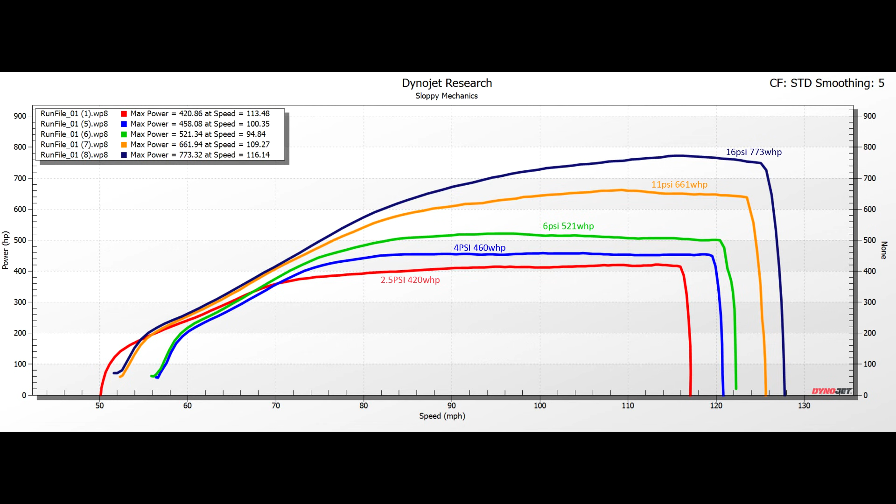We're going to go over my buddy Doug Kistler's Nova, and this is one of those guys, you know, one of your friends, maybe it's possibly you, you know who you are, that has trouble with literally everything. You have the worst luck ever. We call it Doug luck. That's how bad Doug's situation is, and it has been up and down many times throughout the year or two,

Anyway, he did drag week last year, and he actually made it through the whole week and had a decent average. Doug had a built engine, and it gave him trouble with spinning bearings and some other stuff, and I was like, dude, you don't have to listen to me, but take everything out, put in a garbage SBE, start over. So he did that, and he put a different turbo on. He had a 7875 before, a funky wastegate situation, a lot of things.

So he and his friends redid the hot side, and they hung a VS Racing billet 8088 with twin 44mm gates, and he went from a 3-port to a 4-port. A lot of things all at once. Fixed everything up. Doug has had a 4303 fuel pump and SEP 1500s, the old school Deka, for years now, at least since 18 or 19. He's got a Terminator X. It's a stock bottom end 6-liter right now with a Jegs Stage 2 turbo cam and the Jegs XHD converter.

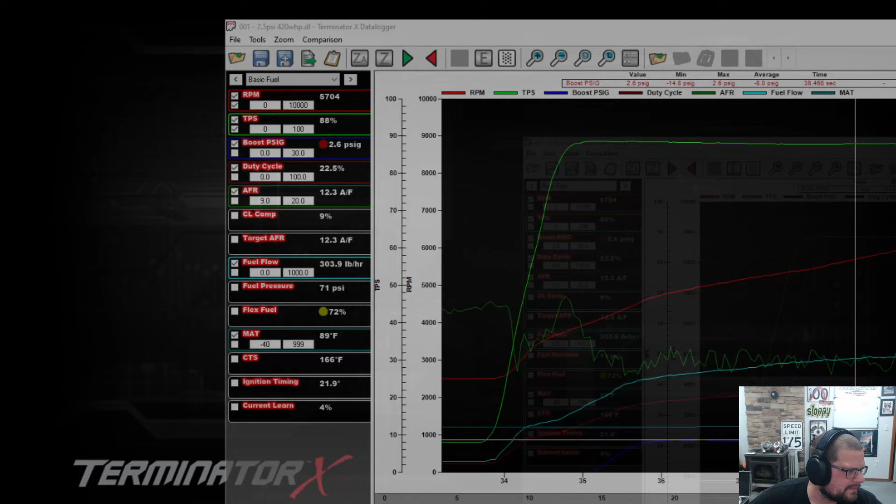So, anyway, we make a test hit here. Roll into it. Everything's good. And it makes 420 horsepower at 2.5 pounds of boost. So I'm bringing up the log for you guys real quick here. No shortage of drama here. So those are same boost. Alright, I got it. Look at this. Twin 44mm VS gates. Look how flat that boost line is. 2.5 pounds. Made 420 rear wheel. Now this is pump ethanol.

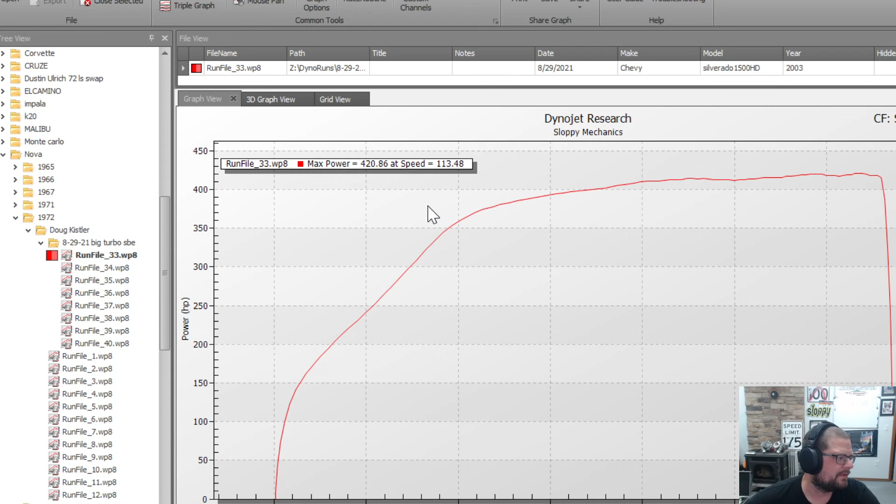And for Doug, with the Doug luck thing going on, I had put in an almost pump gas safe spark table. And also I made the air fuel targets pretty much pump gas safe also, even though he's running E85, because of the whole drag week Doug luck. I hope you understand. I know most of you understand this. So very safe. So that was only 2.5 pounds and 22 degrees, which is nearly nothing. And it made 420 rear wheel, unlocked, TH400, Jegs XHD.

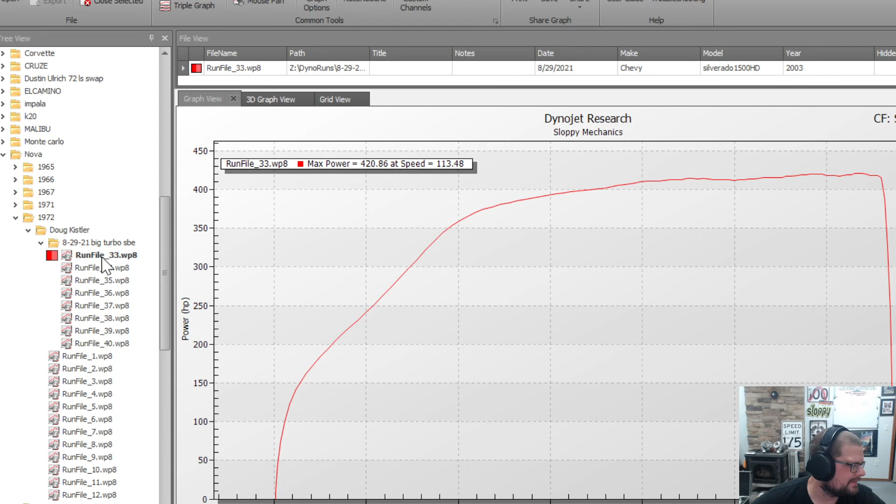So then we messed around with the boost controller a little bit. So this goes to run number 4, which I believe shows some increase. 3.8 pounds. So run number 4 has a 35% duty cycle, 4 psi. So it came up a tiny bit. And what you got was, see, these are a funny number. I have to fix these. 1, 2, 3, 4. 418. Pardon me, gentlemen. Okay, so it made 460, which is what this matches. So a tiny bit more boost picked up a good amount of power.

So this is when we got the wiring sorted, and also this is only a 2.5 pound spring, and it has a 4-port boost controller. So it takes a little bit till you get to some sort of working range, and that was 35% duty. And then, well, let's dig it up, right? So then we go to 6 pounds, V2, 6 psi, V2. So let's show you here. Very level, the twin gates, always astounding with the level. So 5.8 pounds made 521 rear wheel.

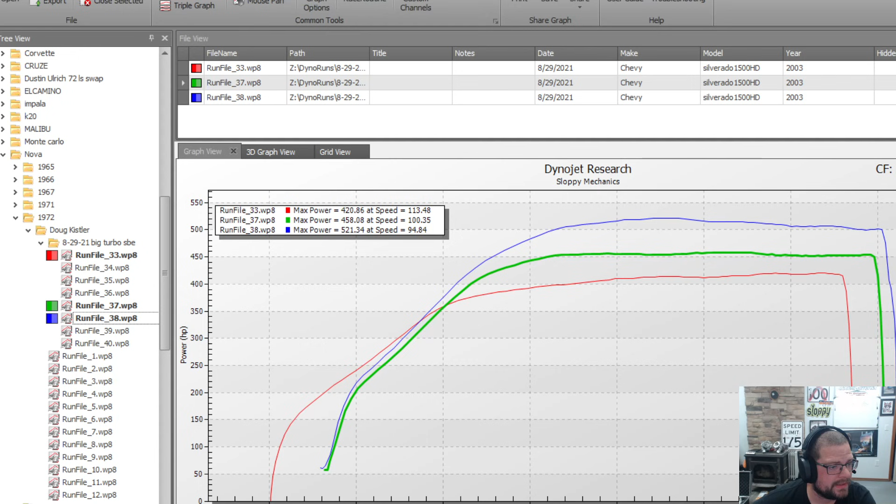That's this one. So this is only 6 pounds. Coming up really nice. Imagine that. So there we go, moving right along. The next we hit was 11 pounds.

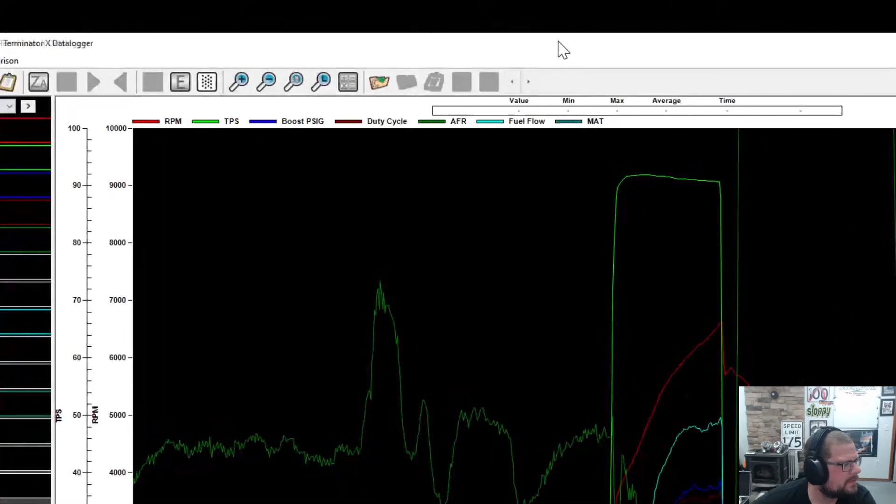So come on over here, give this a quick highlight. So 11.3 pounds made 661. We're gonna look at this quick. Yep, 11 pounds. Man, it really came up. 6 to 11 pounds here. Look at that delta. Woo!

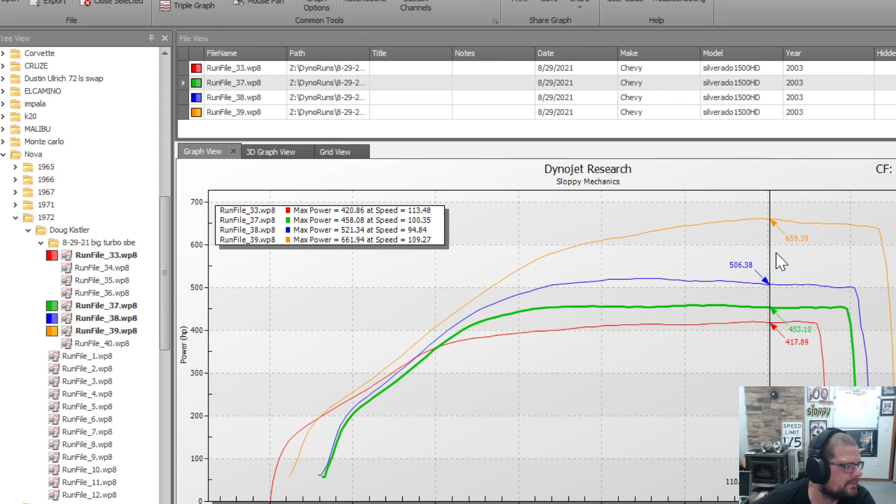Like 160 rear wheel on the climb. Even more there. So yeah, that was a very nice increase. I was throwing some duty cycle at it just to try to get there. And then now I should say that Doug's goal was 700 wheel, because this is a marketplace engine with 160-some thousand, which I said is mint, and he was so surprised it fired the first time.

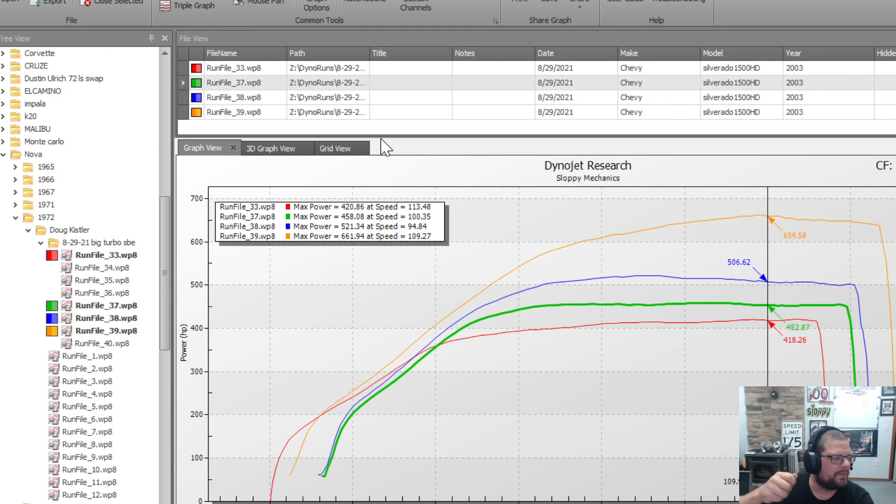It hasn't smoked a day, and you can see when I lift at the top of the gear, it doesn't even puff. So he was nervous, and he's like, you know, I only need about 700 wheel to foot brake 10.0s, which he runs a 10.0 class. And then I installed one of my dial-a-boost things so he can run with the dial, and if it's too fast or too slow, he can just dial it up and down.

So then on the next hit, we just went right for it, and I threw a little bit more boost at it. And let's go ahead. This is the log for the last one. Here. And now, I wasn't running much of a load on the dyno either. I should have loaded it more, to be honest. So boost came up to about 17 pounds.

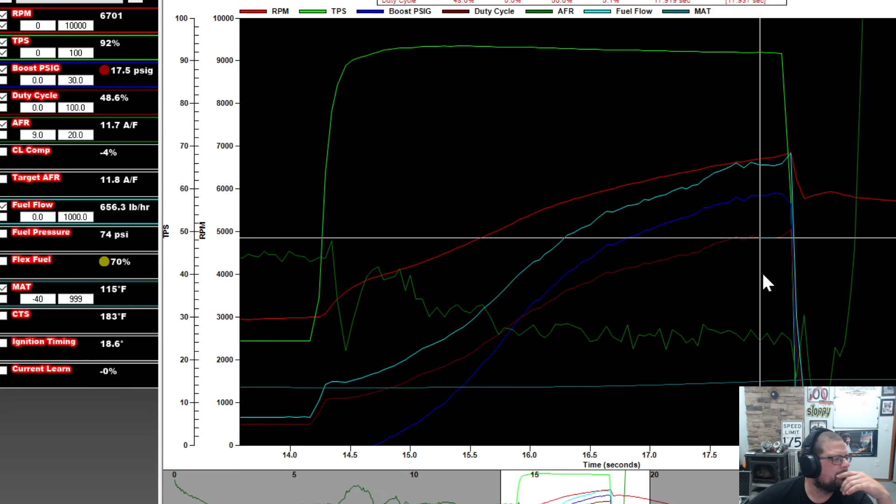It's only using, see, this 11.8 air fuel is very safe on ethanol. I could push that probably into a mid-12 and gain horsepower for sure. And 17 pounds and 18 degrees is a little bit light also for a combination like this. But all of that is intentional, because it still made almost 800 to the tire through an automatic conservatively, and only half of the injector on a Snake Eater 1500 with 70% ethanol. So that's another thing to note.

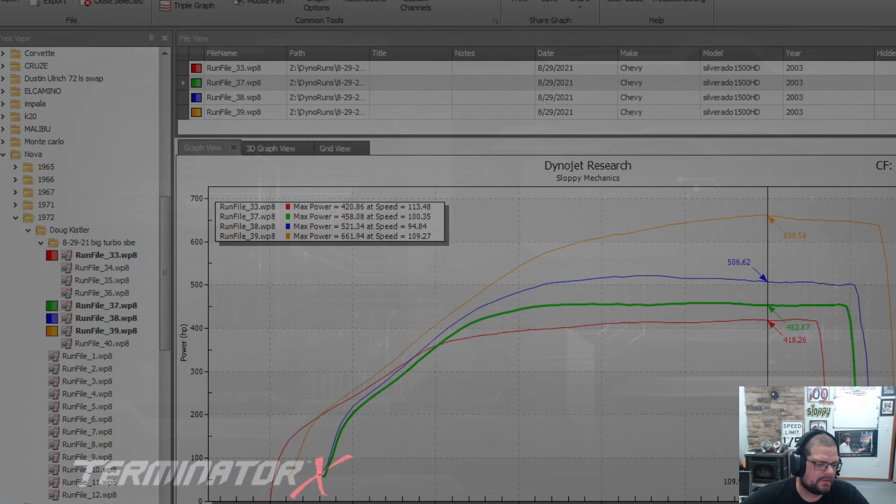And then that was this guy right here. Man, it just eclipses like crazy, right? This is 6, 11, and 17. It's just coming up like crazy, and in my opinion, it's under-timed. So that's all he needs to run what he needs to. So that's it. And then Doug has also said he would love to finish drag week and some passes at the end of the year, and then crank this thing for all it's worth on the dyno and track. So that's what we're going to do, obviously, when the time comes and if it survives.

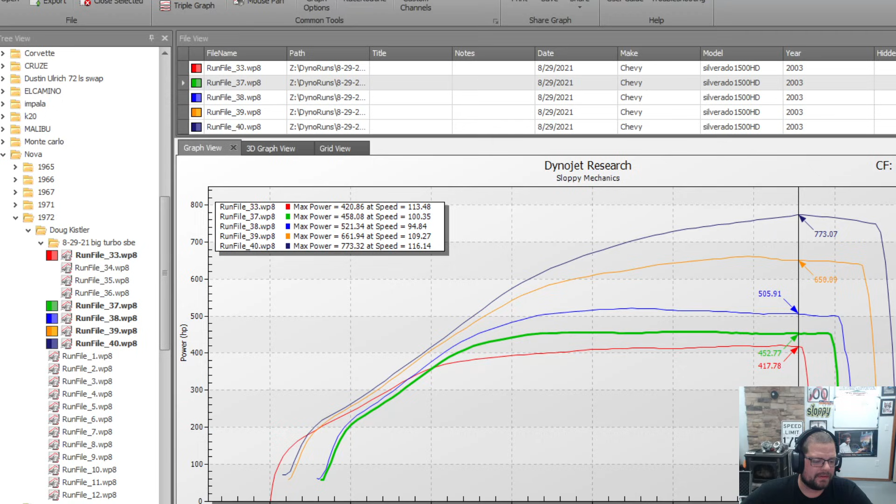But I hope you guys all enjoyed. We have a drag event coming up very shortly, so we needed to hash this out. I put in a safe ignition table and quickly did a fuel setup, and alarmingly, ridiculously, take a look at my closed loop fuel trims, negative 3%. It's extremely close. So we didn't make a lot of hits here.

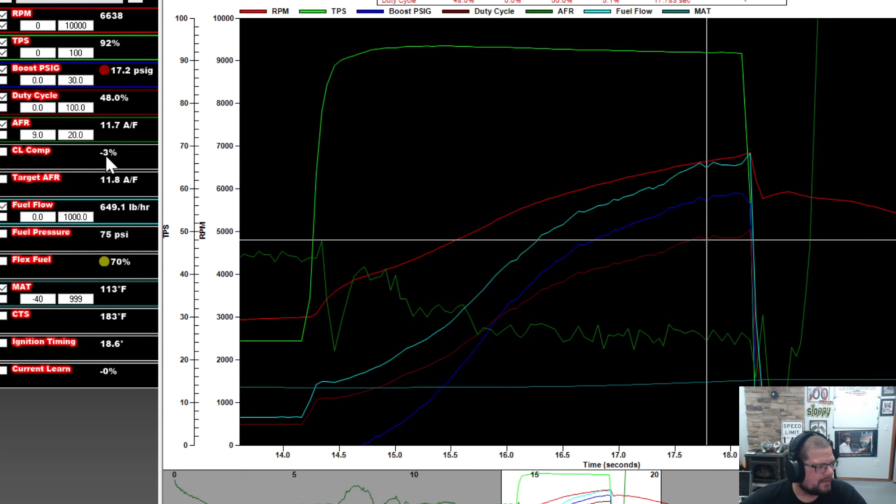It was conservative, and we're letting it go, and we're going to make passes at the track to see how this works out. So we did not do a ton of hits. We did not adjust timing much. It put down very solid numbers for what I had into it. So we're going to go with that, and it's going to get a fresh plug at the track, blah, blah, blah. But on a conservative table I threw at it, it made outstanding power, so we weren't going to smash it that much.

Again, because of Doug's luck, and the power figures were phenomenal for what was in it. I think I said that like 10 times, but I hope you guys understand. This isn't a showcase for this combination. It's more of literally a first swing. I think in a month and a half, Doug and his wife put this together with some stuff laying around in previous things, and built a new hot side and everything else. Relatively small intercooler, only a small 3-inch core, blah, blah, blah.

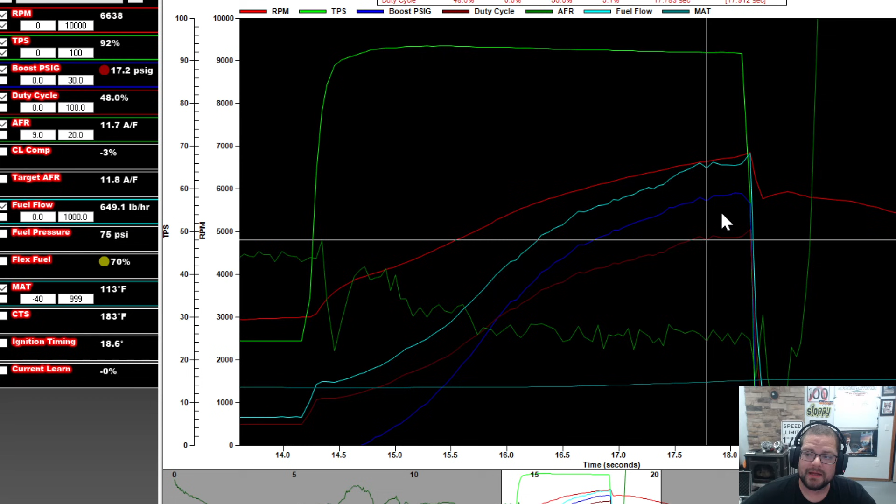Fantastic. So I can't wait to see how fast it goes, and then maybe we'll lean on it at the track. But again, they're doing a birthday track rental and everything else, so reliability comes first, and then drag week, etc. So wish our boy Doug, with his bad luck, some good luck, and we'll all keep an eye on how he does.